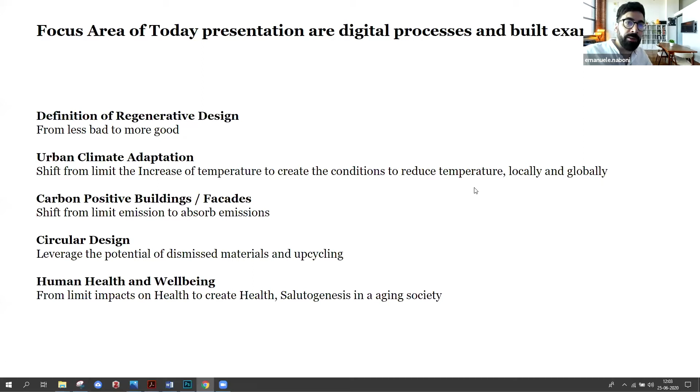So the content of this lecture is related to the definition of regenerative design. You may have heard of it—it's a radical sustainability, or a concept more aligned with Paris Climate and UN Sustainable Goals. Then we will discuss urban climate adaptation, certain strategies beyond conventional ones, and then a debate on carbon positive cities and buildings through the design of facades especially, with some mention of circular design and how the built environment can contribute to human health, and not least to well-being, if we consider that as an extended definition of human health.

If we look at the definition of sustainability, we can see that today it's defined as something that limits the impact of the built environment on the ecosystem. But if we look at a larger picture through this diagram, we can see that sustainable design basically looks to a set of solutions that do not touch the ecology, but preserve the system as it is.

A question can be: but the environment is already being damaged—don't we need to reverse damaging processes? That is what is called restorative design. But if we want to give a higher amplitude to this definition, what if we consider design as something that can enhance and co-evolve human and natural system quality together? So the lecture is around the concept of regenerative design, which, to say in a more general way, is a shift from doing less harm to the environment to doing something for the environment—doing more for the environment.

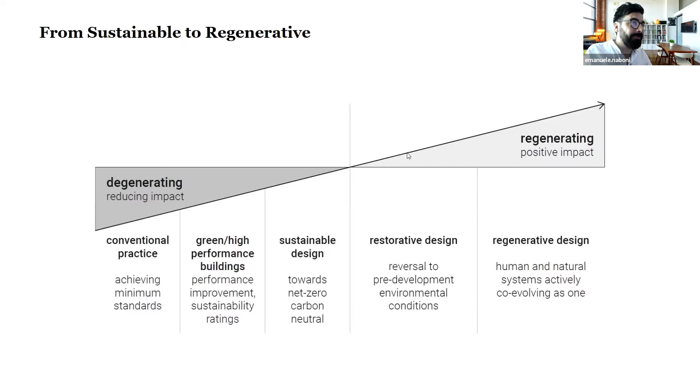And also, if we think about the triple bottom line definition by Mr. Elkington, it basically assumes that economical systems are of the same importance as ecological systems. So he is talking, and that was assumed and adopted by basically everyone, that economical systems and the ecosystem have to co-evolve. This is perhaps today debatable, and a new stance, proposed by the Stockholm Resilience Center, is that we have to put things in hierarchy—biosphere, for instance, is a layer of major importance.

There is someone speaking in the background. If you can please mute your microphone. Thank you.

So this is a key aspect, to put a hierarchy of value at the beginning of each of our projects. Also, if we look at our languages, if we look at sustainable definition, it's all about reducing damages: reduce the need for new ecological infrastructure, reduce the impacts, reduce the contribution to environmental damages.

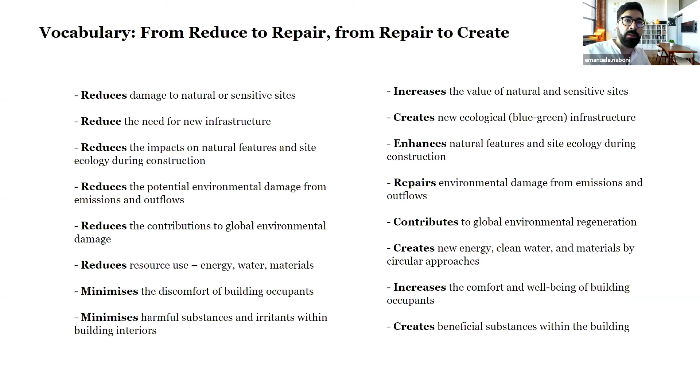Having established the pillars of this contribution, we begin with talking about city - how city can be enhanced in relation to nature, and not apart from nature. Here is some recommendation that will pop up in the contribution. The first is to consider multiple factors, ranging not only from performance-based approaches, but also qualitative factors. The second recommendation, which I'll explain later, is to use future climatic scenarios to design.

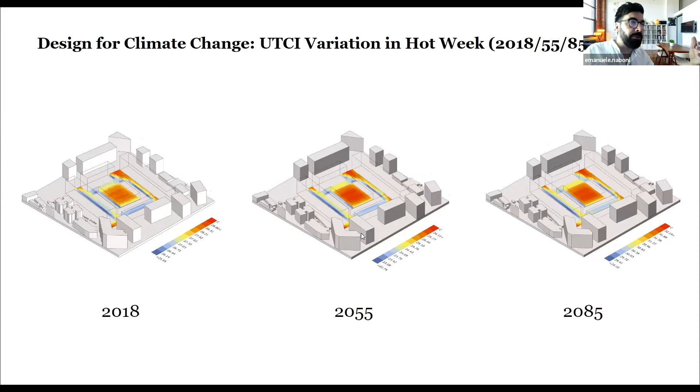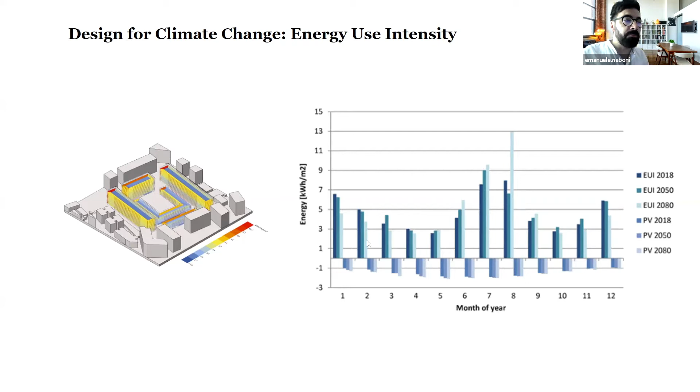And this has a series of circular changes that impact other factors. In particular, we can see that the change in the global and local microclimate is impacting energy consumption. We know, for instance, that buildings will be much more cooling-load dominated versus heating-load dominated. So winters are forecast, according to the majority of scenarios, to be milder, whereas summers are going to be hotter.

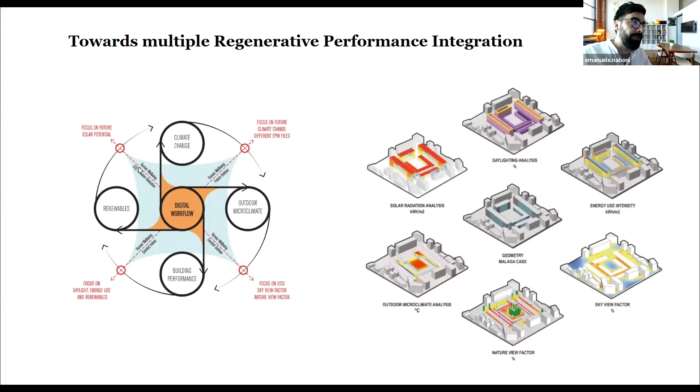The second set of recommendations is about trying to quantify also qualitative factors. For instance, here we have a chart with multiple factors that can be considered when we talk about climate adaptation of the city. Together with more standard building performance simulation related to performance of buildings and outer space, it's interesting to introduce other ways to account for, for instance, biophilia. This can be a nature view factor calculated from different points in space, as well as a sky view factor accounted as a purely qualitative metric, as studies support the idea that a vision of the sky brings value to the experience and to well-being.

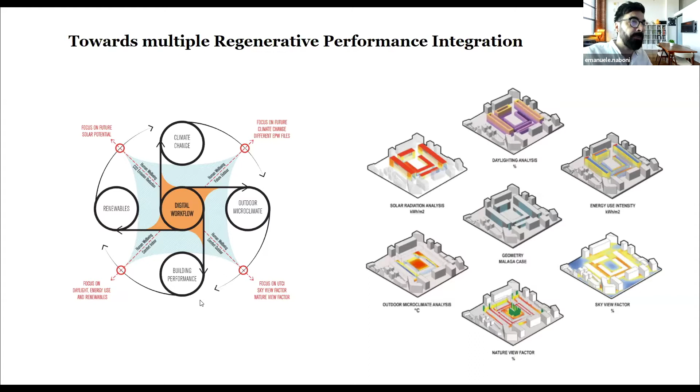Second recommendation is to choose the right type of simulation in your work. I'm actually polarizing a bit the presentation on this, as I know that at the SOS program there is a major interest in simulation, so I'll try to show some pieces of advice.

This is the EPFL campus in Lausanne, where I could stay for a couple of years. The work we undertook was to simulate the climate adaptation of the campus to future conditions, and also how the campus evolves within new climatic scenarios, and how carbon neutrality could be achieved. To engage with such a large campus, with buildings of different epochs and different types of materials within this fabric, and also with major impacting factors such as a big microclimatic feature given by Lake Geneva, we looked thoroughly into existing sets of simulation tools, but none of those was actually able to simulate the multiple factors, including all the energy exchanges as well as the microclimatic features of the site.

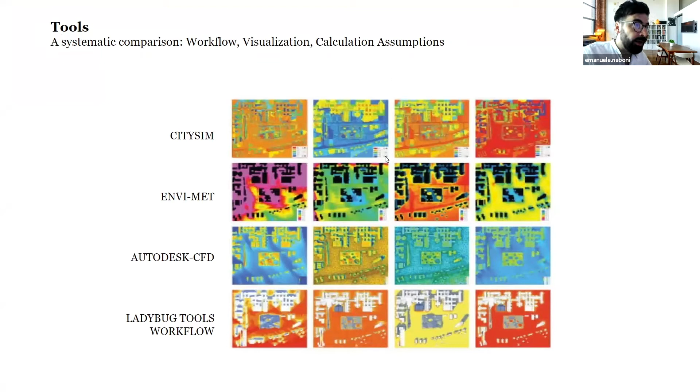So we further developed a software called CitySim. CitySim is a fast simulator, open source actually, that allows us to predict within a very reasonable time all the thermal and energy exchanges that happen in a site. We can call it a very simplified EnergyPlus, whereas all the sets of equations are interrelated to local exchanges, whereas EnergyPlus concentrates more on the inside-building exchanges.

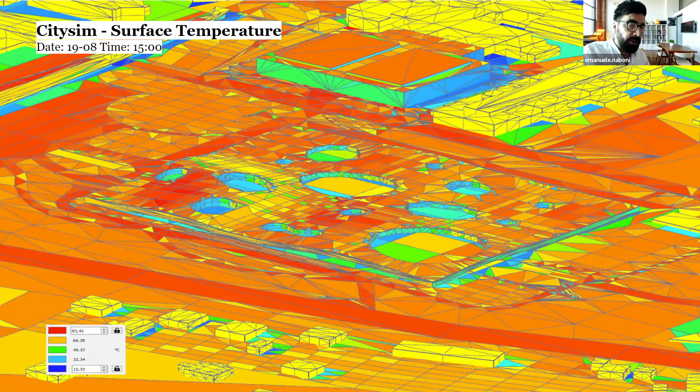So here, for example, is information about the temperature recorded for a given certain time in the year. This is a quite powerful tool because it allows, for instance, establishing a relation between building forms and the type of carbon performance of each. Then it's possible to associate a color code that establishes what type of building should be retrofitted. Furthermore, it's possible to include different retrofit strategies and balance and see what is the carbon impact of each building and of the campus as a whole.

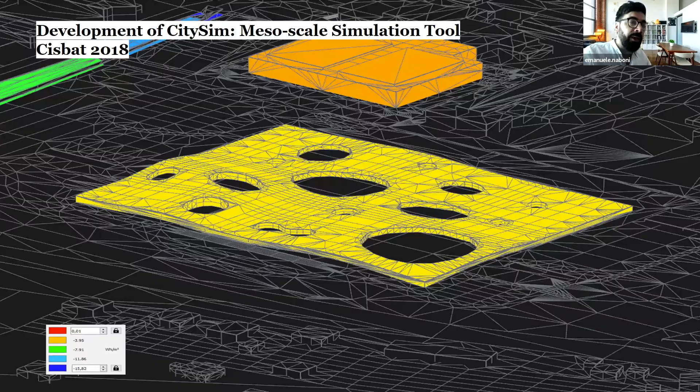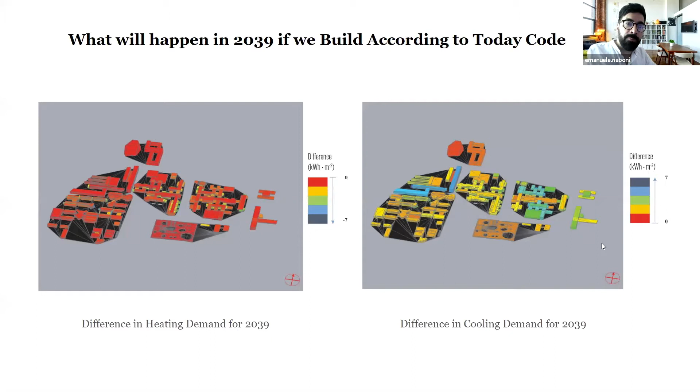This is, for instance, a calculation as a whole. What is interesting in this chart is that we are trying a scenario of adding insulation, which is what, for instance, the Swiss Minergie system would suggest. It's interesting how all the addition of insulation, which is today recommended by European norms, is going to fail in future summers, leading to a difference of 7 kilowatt-hours more in consumption. This is quite an interesting topic, which I will touch on later when we discuss the carbon neutrality of buildings. For now, just keep in mind that most of the legislation pushing for added insulation is probably misleading.

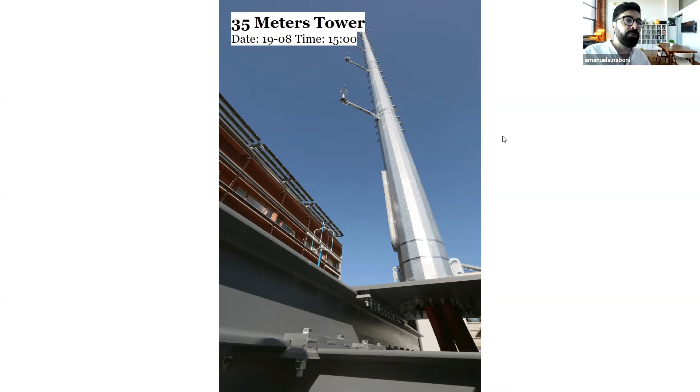Also, it's very important, when you achieve this work and when it's possible, to include a set of local measurements to calibrate the model. For this campus, for instance, we used 35-meter towers to get wind profiles and temperature profiles at different heights, as well as a small black globe thermometer to measure mean radiant temperature. Different points on campus were measured, as well as surface temperature, which is one of the outputs of the simulation, sampled and measured for different parts of the campus.

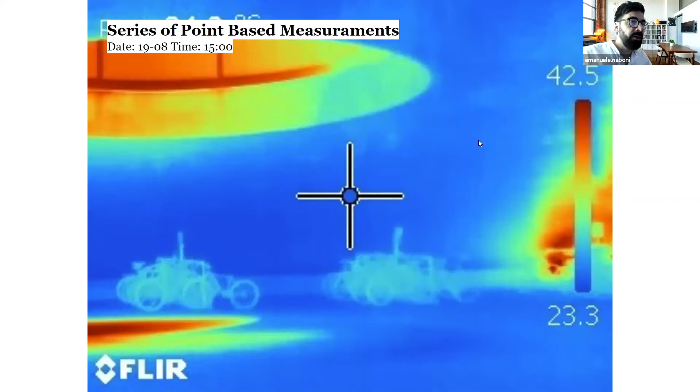This, for instance, is a study under the Rolex building of different key points.

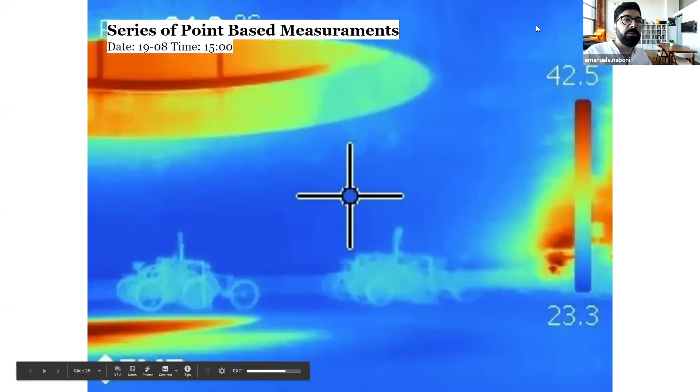Some information on which tool to use: when you can use ENVI-MET, when you can use Ladybug tools, when you can use CitySim, or other software such as Rayman. So it's a paradox, but basically not every tool fits every type of context, and depending on the type of exercise or work you are undertaking, it's important to choose the right tools. There is quite an accurate analysis looking at all the equations, publicly available on my ResearchGate.

Okay, second topic: carbon positive buildings. The first type of recommendation is to look at local climate and do some work assessing it.

To do so, especially in Copenhagen, we set up, in collaboration with the Technical University of Delft and Munich, a series of surveys of a certain area in Copenhagen, with real detecting of environmental factors. This is an evolution of climate work developed by TU Munich, which we transformed into a kind of climate cycling. The idea is to combine measurements together with simulation in order to understand the nature of a local microclimate.

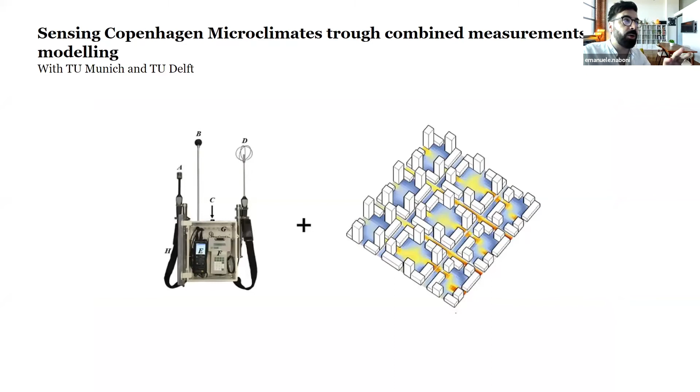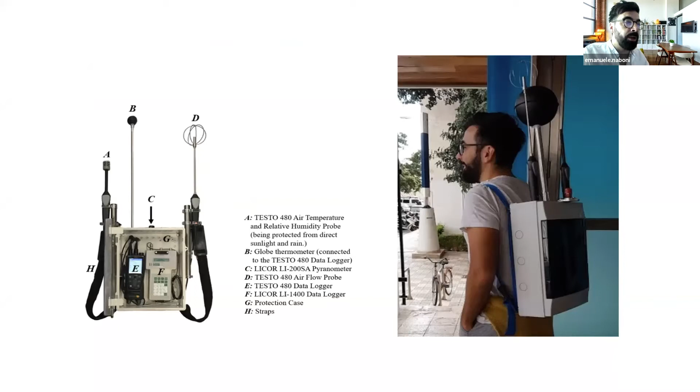Here is an open section of one of the devices that can be used to capture local information. These briefly range from wind speed to, in particular, the radiant environment and air temperature.

Also, it's quite important in this type of work to relate physiological values as additional information. So a set of measurements are taken on specific parts of the body that reveal adaptation.

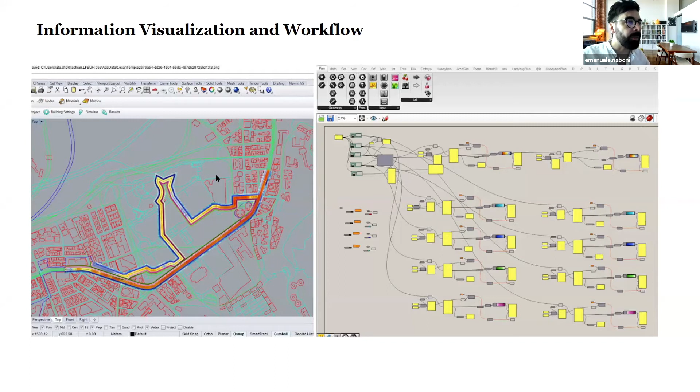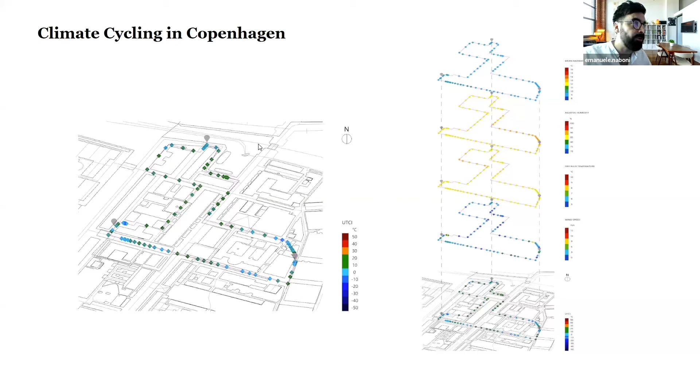As well, all these are mapped into points with different layers that can contribute to index definition. In this case, it's the universal thermal climate index that is reported, which is, as you may know, perhaps one of the most established ways to assess comfort outdoors.

Interestingly, it's then possible to calibrate simulation models in order to begin to establish a certain correlation between different urban forms and the type of experience that can be recorded.

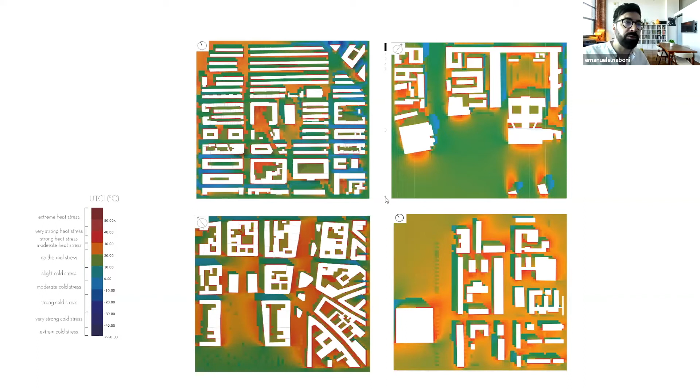This is key information not only for outdoor comfort, but also for the energy modeling of buildings, and localized weather files or specific point-based information are actually very much needed when you begin a design - much more than the simple weather file you get from a weather station. Most of the time, weather files from a weather station are misleading and will not lead to the best design for your climate.

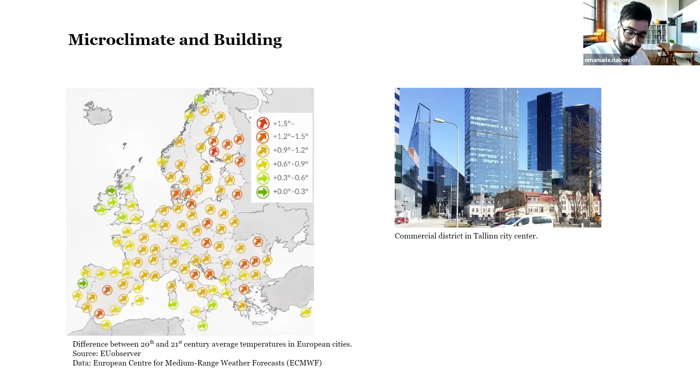Another interesting factor is about geometry—not of the building or urban morphology, but distance and positioning of buildings for new development. This is a hot topic, especially for cities like Tallinn or others in Northern Europe, where new sets of tall buildings are popping up. If we factor in the reflection and major modification that tall buildings imply for local climate, combined with climate change scenarios, it becomes quite relevant to understand how to distance or arrange arrays of buildings.

So just as you would do with 3 cards, in this exercise we've taken 3 tall buildings and begun to change their distance, even with very minimal fine-tuning modifications. For instance, distancing the buildings from 12 to 30 meters may not sound like much in terms of meters, but let's see the thermal implications.

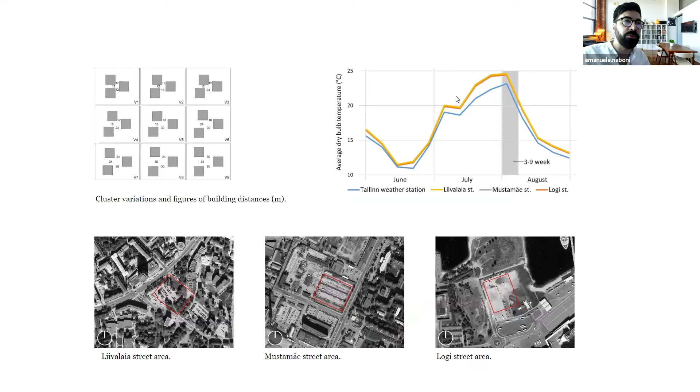We also try to understand how different layouts perform at different sites within the city of Tallinn. The first step is to use Dragonfly, or the urban weather generator, to create local microclimates. The second step is a workflow that allows you to understand all the temperatures and thermal exchanges—related to short wave, long wave, and convection—through computational fluid dynamic simulation.

What's interesting from this first analysis is that site percentage, or hours of comfort, can differ a lot from building array to building array. This is important information—we can see, for instance, that one configuration will perform well on one site but badly on another site in the city. Comfort can range from 30 to 50 hours depending on the type of design and the type of location. So this is quite relevant: small modifications can have a big impact.

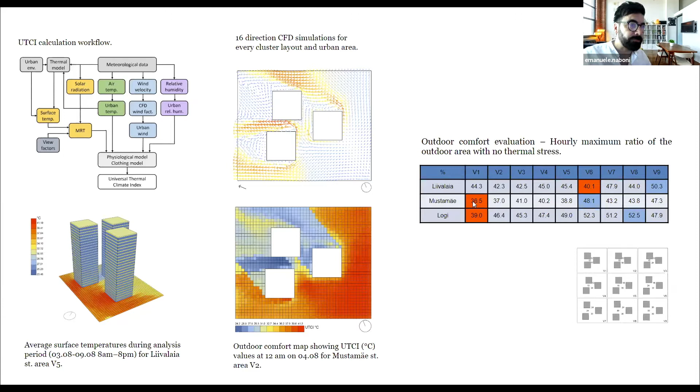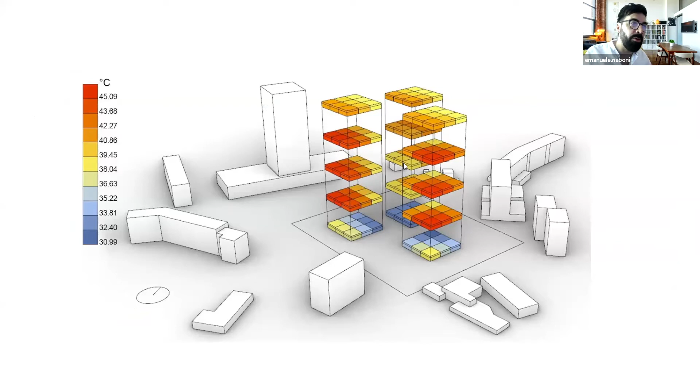The second point is about how the distance between buildings and the microclimate impacts what's happening in terms of comfort within the buildings. Due particularly to the co-reflection that happens between buildings, and due also to shading among buildings, it's interesting to see that depending on the type of site, a different layout may be more performative. These are the 3 sites.

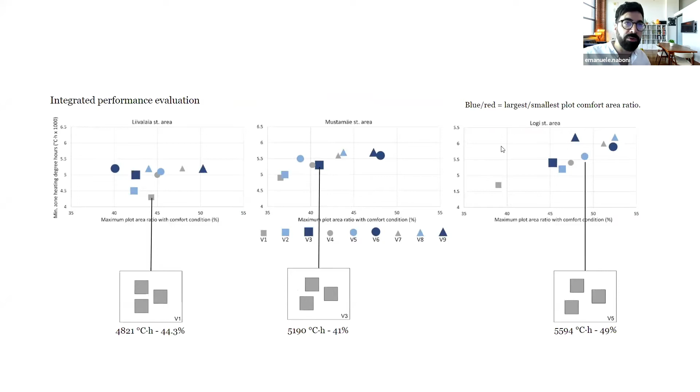We can see that a small modification of the layout can lead to major modification in terms of energy consumption and comfort.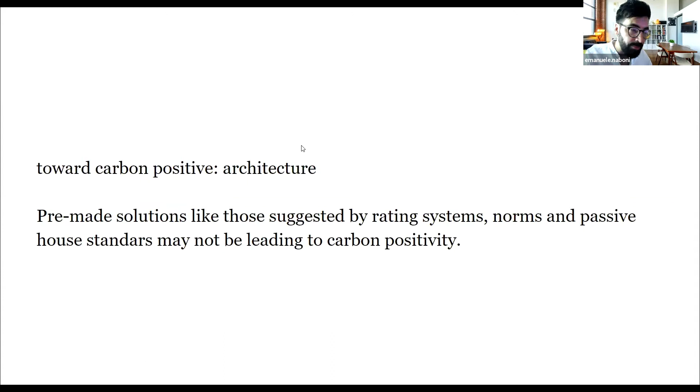Another aspect is about predefined solutions, as those suggested by rating systems such as the passive house standards, or European regulations concerning the thickness and type of insulation and the transmission values. It's mandatory according to the European Union. Let's have a critical look at this type of topic.

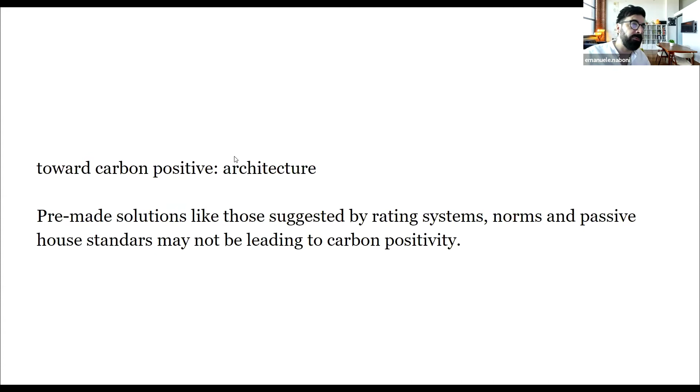You may have gone through the book Heating, Cooling and Lighting by Norbert Lechner. He sustained that just by building design, it's possible to achieve savings of up to 70%. This was elaborated in the 70s and was not sustained by simulation, and it makes mechanical engineers quite skeptical, because they believe mechanical plants have the major power. So, of course, this is a big debate, and we can take it to the next step in other circumstances.

Throughout this experiment—basically 25 million combinations of simple building types, from square to rectangular to more elongated, and modifications of building envelopes from more massive to more insulated—we can see that just by architectural manipulation, without any mechanical plants, it's possible to reach energy savings of up to 80%. This means plants are not needed, or only minimally needed. This applies both to commercial and residential buildings. Mechanical plants are an addition, but in most cases, I would sustain they are not needed.

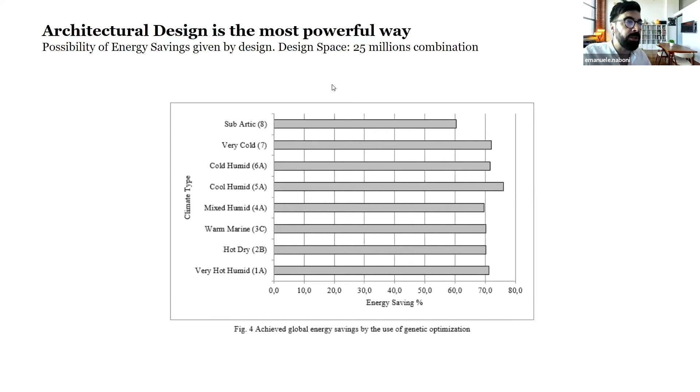This includes, of course, natural ventilation among the set of strategies.

Going more into numbers, one important thing is U-value and thickness of insulation. It's interesting—there's a very optimal thickness of insulation according to the distribution of values on a Pareto front. The prescribed insulation thicknesses are much lower than those prescribed by regulation, and prescribe much more use of thermal mass. In certain cases, especially in the South, light and poorly insulated buildings will perform much better than heavily insulated buildings. This makes logical sense if you think about it.

Insulation is nothing else than, let's say, a wool sweater that you put on and cannot take off. In summer, this sweater cannot be taken out. So insulation only performs when you have a mechanically ventilated building with cooling, which honestly we should not aim for. Our building should not rely on a mechanical system, as it's completely possible to avoid them. So this is quite misleading, and that's why most recently designed buildings are overheated in summer.

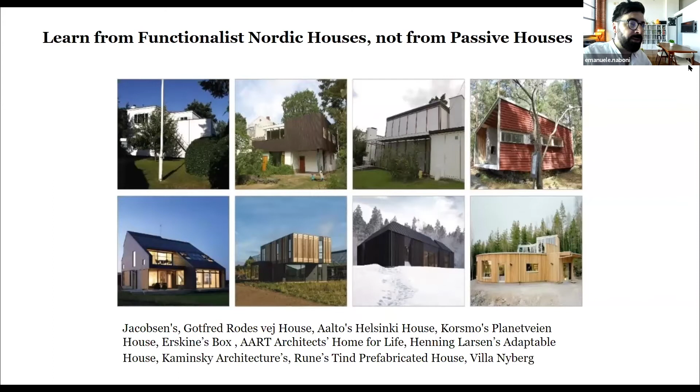I will demonstrate this through a series of buildings that I personally studied in a Northern climate, designed by architects for themselves. We have the house of Alvar Aalto, the Korsmo, Ralph Erskine, as well as Jacobsen house, each in a different Scandinavian country. And in the second row, we have buildings designed according to the recent paradigm of passive house, adaptable house, prefabricated house, and so on.

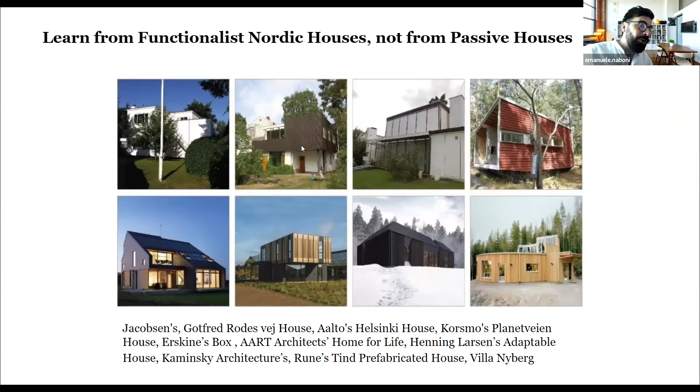So we have developed models of this and created every type of simulation. The idea is to compare environments such as those of passive house, where you want a uniform luminosity, a uniform thermal environment with equal distribution of heat within the site, and where the building is conceived as an envelope acting like the walls of a fridge or an oven. Therefore you're able to keep the temperature stable and control any type of factor.

What if we compare one of these examples to the Erskine house built in a forest in Sweden? This was built with no access to any type of industry, because it was built during the Second World War, when Erskine came from England to Sweden to practice as an architect. Because of this big conflict, he had to build something relying only on local sources of energy, reclaimed local material, material found within a range of 3-4 kilometers.

So some aspects of bioclimatic design are interesting. On the northern side, there are no windows, and wood is stacked, especially in winter, to break thermal exchanges, the radiant thermal exchanges with the outside. You can see there is a double door closing off a space - two doors, as in most houses of this modernist period. We can also see thermal mass located in a certain way, connected to the outside to maintain a certain gradient of heat.

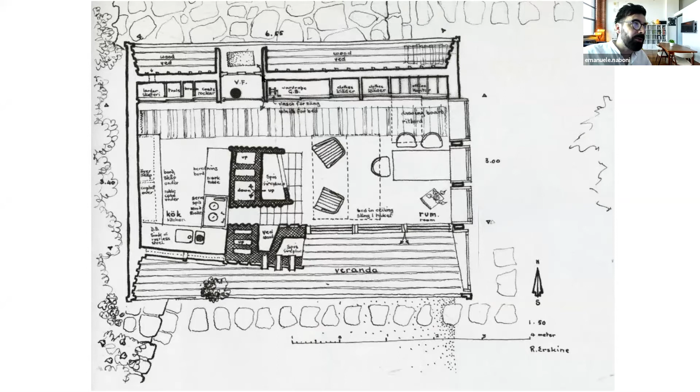Here you can see the double door, the vestibule, if you want to use a Latin term. This could be a two-hour lecture, but I'll move on to share another situation.

But if you look at other types of impact, without going into biophysics factors or light quality, it's something that really needs more time to debate.

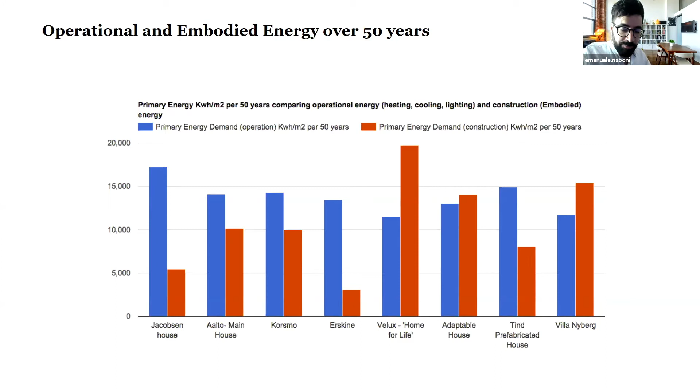This is something to think about. I believe pre-Carrier, pre-mechanical system, pre-industrialized architecture has certain values that can be rediscovered in modern construction.

My idea is that perhaps we can rediscover this older way of relating to the site versus the newer way. I'll move on to stay on time, but I'm happy to come back to that. It's also interesting to think of buildings not only in an introvert way, but also in an extrovert way—buildings that provide something for the outdoor.

In Copenhagen, I've established a series of facilities where we've begun tracking the impact using a very simple paper-made facade—what's the impact on the indoor, but also a similar measurement tool located outdoors.

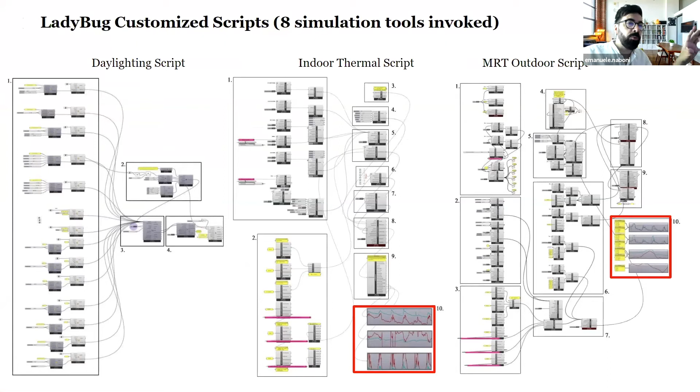So the question is, how can we make a facade that gives a positive thermal contribution both to the indoor and the outdoor? With warming cities, it's important to have cooler streets, and in northern winter climates, it's important to have warmer streets. So let's think of the envelope as a climate giver, not only for the indoor, but also for the outdoor.

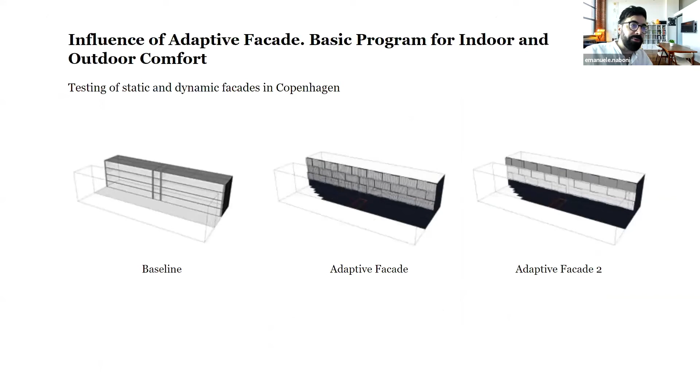Through a set of calibrations at different scales, we see that depending on the type of facade—for instance, here we've taken four types for a building retrofit, from no shading to steady-state shading to dynamic Venetian blinds to adaptive facades of different kinds—the results are quite interesting. We see different temperatures achieved indoors. Okay, nothing new, we knew that.

But what's interesting is that we can significantly change the climate on the street, especially in small canyons, and also for large spaces—all the areas near the facade can be controlled by changing the facade type.

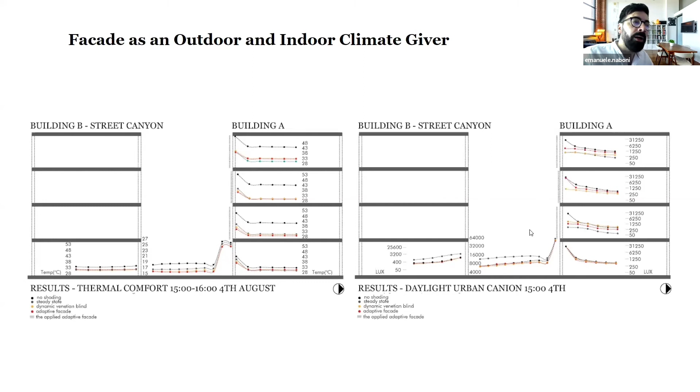So you understand that with very little cosmetic intervention, it's possible to have a big impact on the microclimate experienced outdoors.

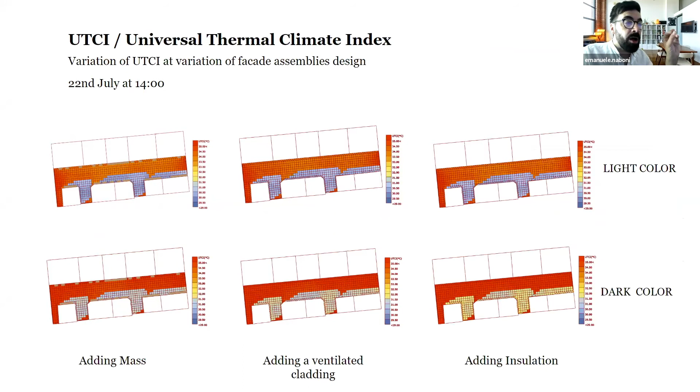Just to provide an example—changing the color of the facade to simplify and target this small variable will have an impact. This is a study in Catania. On the outside, we see different colors of UTCI outdoors, and as we know, this will also impact the indoor.

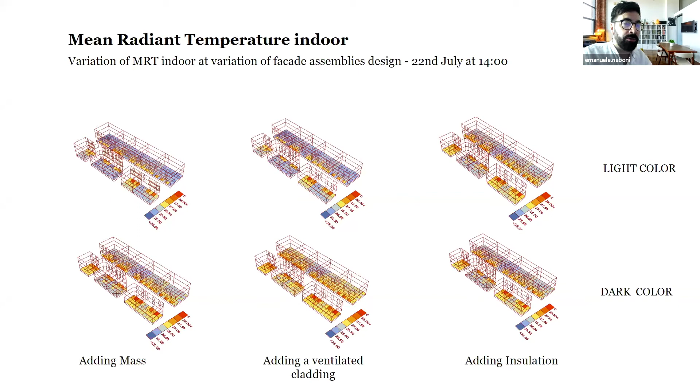So what I'm advocating is that whenever you design your envelope from now on, always model the outdoor and the indoor at the same time.

Another recommendation is about using prototypes, because they offer much more insight than simulation. When you design your strategy, I suggest leaving your desk and computer—which also isn't great for your eyes—and engaging with physical models.

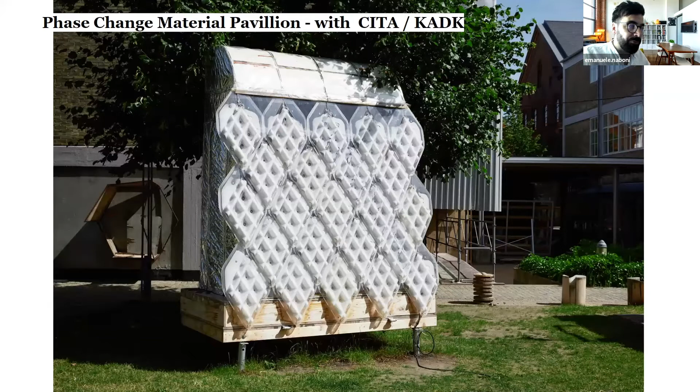These are some studies I've worked on. This one is about phase change material—with digital printing, we've formed different layouts and tried different mixes of phase change material. This is a very interesting study, conducted with CITA and KADK.

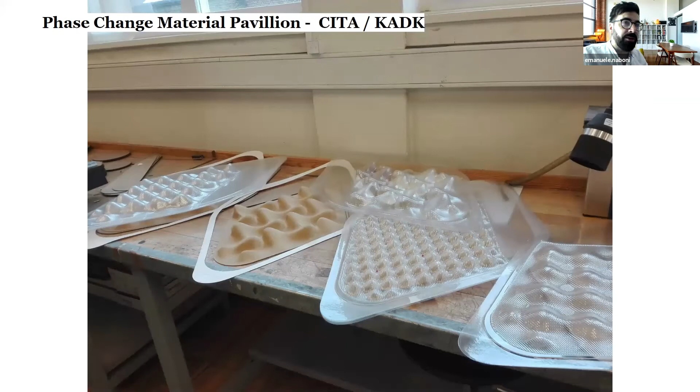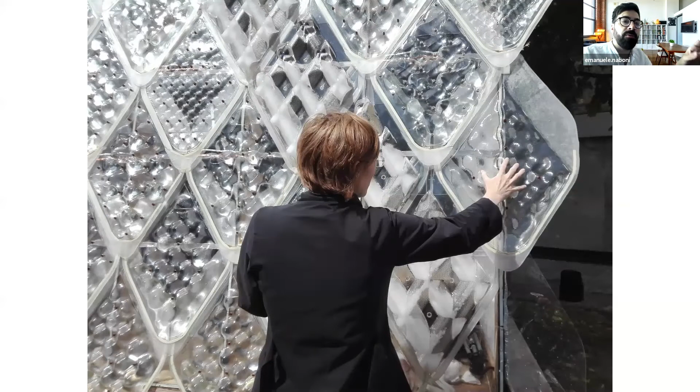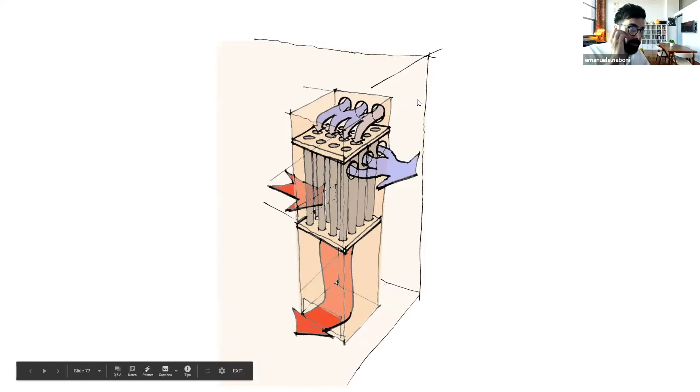Also, thinking about air exchanges, I found very old notes from a professor at the Danish Technical University from 1952. Using these old sketches, I tried to develop, calibrate, and perfect a system of air exchange for a small prototype I could create in Copenhagen, where there's a natural exchange of air between indoor and outdoor. Here is the sketch, where basically we use this metal tube to exchange heat. What's interesting is that through measurement, you can extend the time of passive ventilation and climate control for the building for most of the year. It's a small prototype, but it shows how by exchanging heat between inside and outside, you can create a passive building at basically no cost.

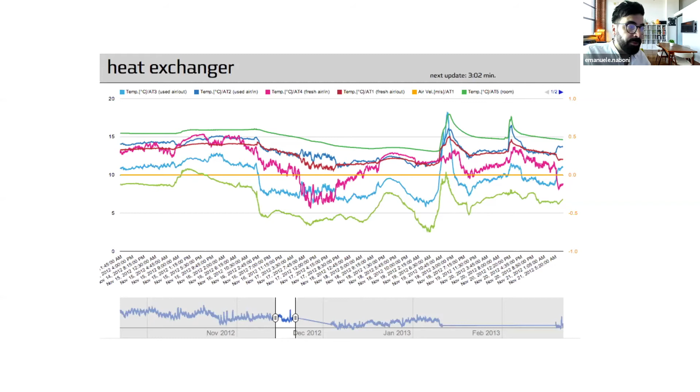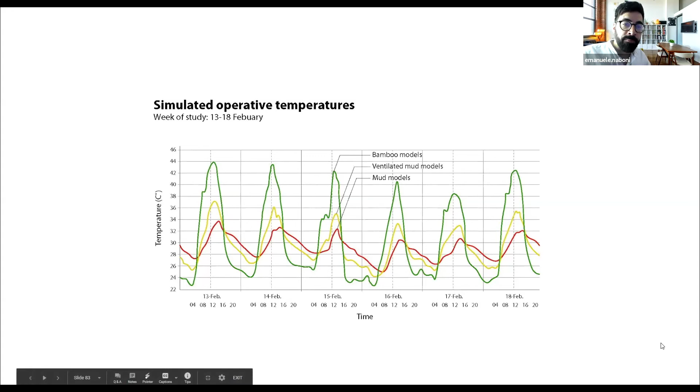What we can see, for instance, is that at night, when these buildings are occupied, the temperatures are much lower when roofs are thatched or made of bamboo, rather than corrugated, which is what's actually being proposed today. On the other hand, if the building is occupied during the day, it becomes much more interesting to use a corrugated roof. So depending on the type of building, you can choose the type of roof, and even in houses with both day and night use, you can differentiate the roof accordingly. This has now been used as a recommendation for new villages in Tanzania.

When it comes to another pillar of this presentation, the topic of circular design and generation of health, I'll present some of the work we've established along with the Master of Architecture in Extreme Environments. This is a two-year master's, perhaps similar to yours, that operates in extreme conditions where there's a decrease in quality, whether in climate, access to the area, pollution from a cycle that has heavily polluted the environment, or because human conditions are quite deteriorated. This master goes to a different location every year. I will keep this collaboration—I moved to Parma University but remain a part-time professor in Denmark too. The idea is to use small hacks or prototypes to solve some of these situations, and also collect information for future design. As shown before with the house example, it's possible to generate direction from a small example for the second semester, where students can create their own project development.

I'll show a video that introduces the work we did this winter, where we went to the Atacama Desert in Chile. I hope you can hear the sound.

So one of the important aspects to remember is that we don't want the students to be engineers or scientists, but to recognize the importance of the scientific method in collaborating with different technical competences. Hence the balance between having one foot within the very performance and scientifically orientated aspects of architecture, and on the other hand...

A very artistic consideration of what is it that I want to say in the world, where am I talking from, and why. That is reflected in the course, both in the prototypes that they do, and through that exercise, finding a program and a building.

Okay, so the idea is to create prototypes that collect information of different kinds. You can also access this on YouTube under architecture and extreme environments, where you have a gallery with many of them related to different environmental topics.

Coming back to some of the directions that may be usable for you, one idea is that we can look into, for instance, circularity, which is external to the cycle of buildings. Here I show perhaps another video of a specific prototype developed by this student.

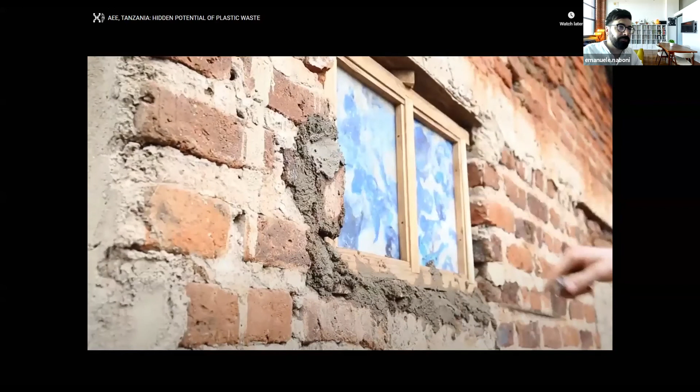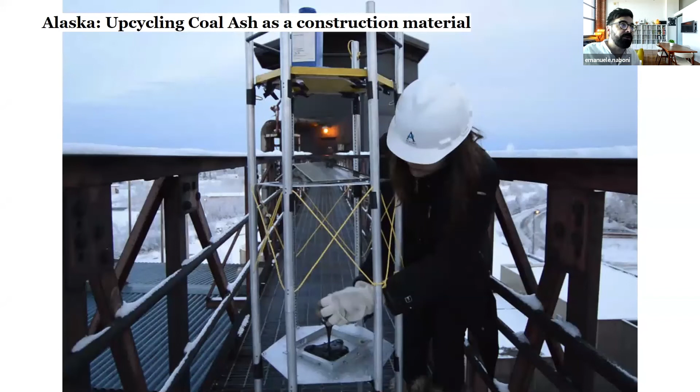Okay, so I guess you have gotten the idea of these prototypes, but some of these have even scaled up to some patents. For instance, this one, which is about upcycling coal ash as a construction material.

We also patented a way to convert sand from the Gobi Desert into a construction material, as well as to use waste wool or textiles and crystal salt available in the Gobi Desert as an air purifier. So you can see that a whole set of material from other industries can be brought into the industry.

Another aspect explored throughout these devices is well-being, health, thermal comfort, and establishing this not only as a pure performance, as a pure numerical factor.

Here is an example that we just published in Energy and Buildings, which is about designing spaces and outdoor spaces that relate much more to the displacement of heat and cold sensors within the body. Heat and cold sensors are located in different areas, and each of which is activated at different temperatures.

So the idea is, what if we begin to look at climate not according to standard measurements, but according to the position of thermal receptors in the body? And this can be information that we can use to design spaces.

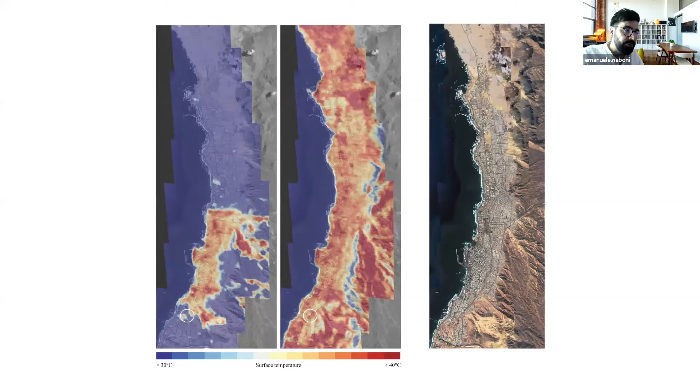This has been further developed in the city of Antofagasta in Chile during the extreme environment mission of this year with Amy, an English student I work with. We began to study through satellite images how different urban patterns determine different microclimates.

And then we came up with the idea that although it's a very hot, dry area, adding mist could create major comfort. And this is not supported, for instance, by psychrometric charts, where the more you increase humidity ratio, the more you will experience discomfort.

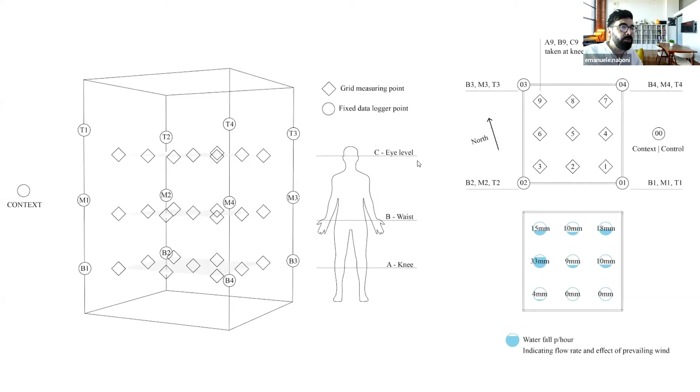The idea here is that we can play with the perception of the human and with the location of the body's sensors and stimulate just some of them. So we created a system such as this, which basically creates mist at different heights.

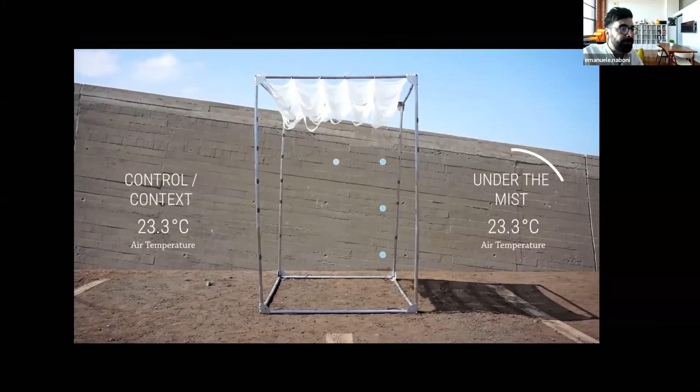Throughout a set of sensors, we begin to measure for each of the points within the space how temperature is distributed in the surrounding. The system sprays water, but mainly retains water throughout this very small system.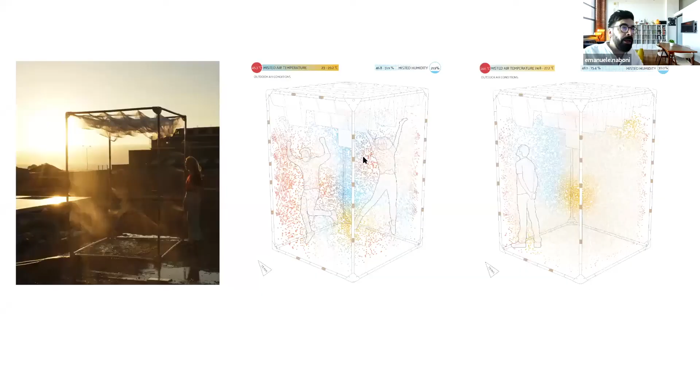What is quite interesting is that from one side, they're recording on site a different point of, for instance, the UTCI, and from the other side, the information that comes from surveys. It's very remarkable that the system can obviously reduce the local temperature, but the perception of reduction of temperature, which is much needed in that area, is much higher, because other factors such as thermal perception, alliesthesia, or thermal delight have to be taken into account when we talk about comfort.

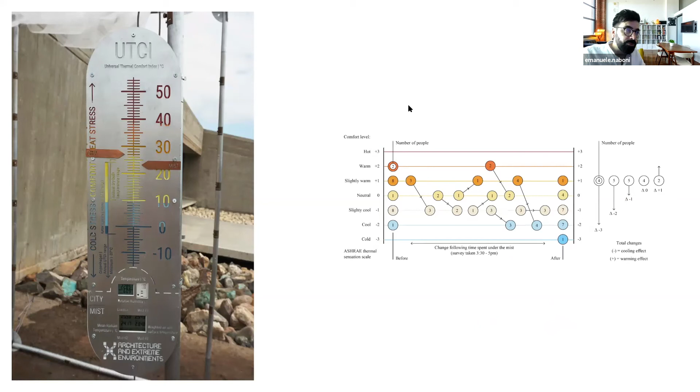This is a branch of studies that I will also show later in a later example. We have perhaps 5 more minutes, so I'll try to go through a bit faster.

I want to show a further example of how with a small architecture it's possible to create a microclimate. We've seen that before, but I also want to share how it's possible to use a completely local-based cycle in order to create a microclimate. This is the Amazon forest, where every day you have 1 hour of rain at a given time, and it's also a site with major availability of bamboo and where there is glue, actually rubber, that can be locally made and developed into surfaces. So this is a completely local-based prototype where only the metal rings come from Copenhagen.

This is a system meant to use local water in order to create a microclimate for the 24-hour cycle. Now you can see how it works.

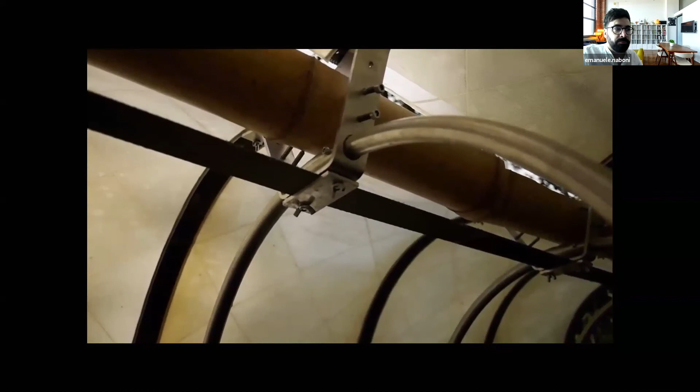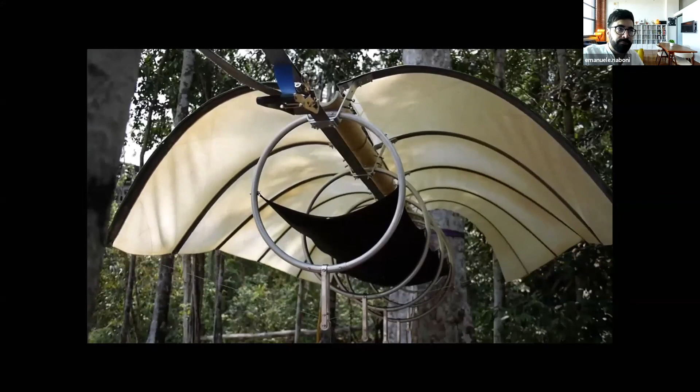So water is collected into plastic bags - these are hospital bags. When water finishes, the hospital bag begins to drop water, and this begins to happen. But what we have achieved is this ring where the water still collected is at a much lower temperature. So they create a mean radiant temperature, the local mean radiant temperature, which is ensured for a few hours after the water event.

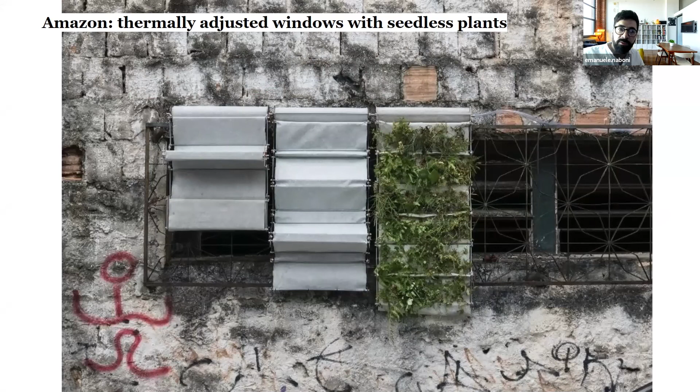We developed many of these technologies that are very intuitive to use and that add a design component. For instance, this is a small and cheap unit to purify air for one house in China, which is completely passive. Or this is a curtain system which employs seedless plants from the forest in order to create outdoor and indoor microclimate of a certain type.

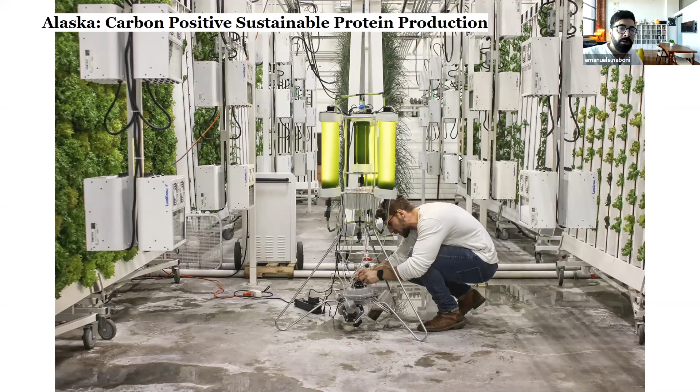We also touched several other topics. For instance, how to create protein within the Nordic pole by developing certain algae which are actually conserved into the ices. Or this prototype of a lamp is basically completely passive, and it also purifies water, but it also stores energy that is then used during night to achieve light.

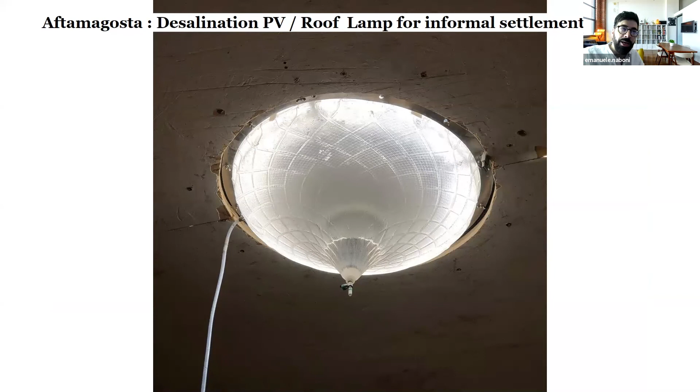So you can then browse more of these prototypes on YouTube. Now, to conclude, I would like to show some building examples. These come from my practice.

The first is the Oakland Cathedral of Christ, close to San Francisco. These are only examples that incorporate the values you have seen before, particularly examples incorporating biomimicry - the mimicking of phenomena in nature - and biophilia. These are examples that nourish this non-saturated thermal aspect, and by playing with the luminous environment, the color of material, and the height of space, it's possible to create thermal conditions that make people who come to this church comfortable, whereas there is no mechanical system.

What is very important, I think, in thermal, lighting, and comfort is not to use static metrics, but to create an ever-changing environment. This is activated here by triangular panels that regulate light, ventilation, and intake of heat. This is also sustained by thermal models, where it's possible to see through finite element methods that certain areas, such as the basement, are kept in full comfort throughout the year by means of thermal mass, but also by means of this very high space.

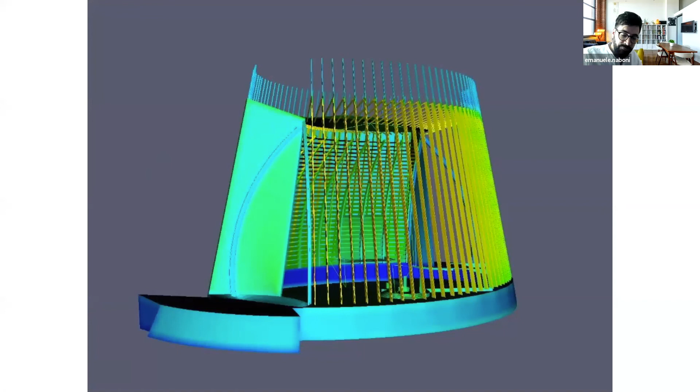Here is another example, in Italy. I developed the sustainability concept for the Lavazza headquarters in Torino during the competition phase, when the project was awarded. The idea is that the building is a regenerative building which adds value to the site. The building follows the solar envelope principle, so it doesn't create shade and doesn't compromise the ability of the surrounding buildings to receive heat.

So it's very important, for instance, if you are modeling the efficiency of the building, that you do two models - one model for the building and one model for the surrounding. To me, architecture that is introvertly developed, just modeling the performance of the architecture itself, doesn't make sense. It's important to model the energy performance of the whole surrounding. Each of these buildings has to be enhanced, if not, at least not harmed by the new development.

So this is another recommendation I would give you: if whatever you are designing, model also the context, and try to understand the consequences for the context. I will not spend much more words on the regenerative agenda and how this is a landing surface for bird migration.

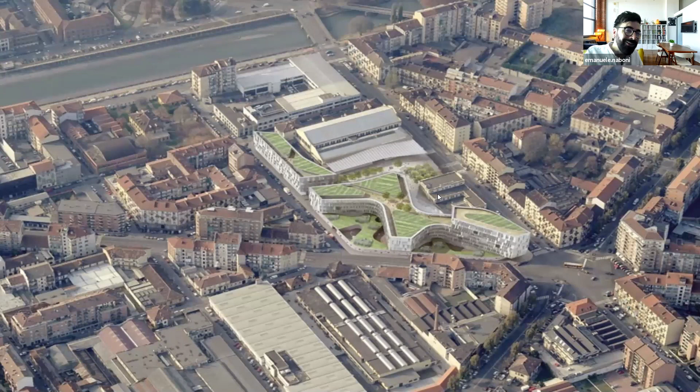This requires much more time, but perhaps it's interesting that the envelope where each facade creates thermal asymmetry. Each change, from double facade to trombe wall to different colors, creates different luminosity and different thermal conditions, different surface temperature on the indoor. This means our body has different thermal stimuli, and all research today supports, especially for diabetics but also general health, that the envelope has to create differential surface temperature.

The death of the human is when you want a space which has the same temperature everywhere, which is actually what you do with radiant systems and what you want to achieve in any passive house or commercial development with this type of agenda. This is actually the fastest track to generate some of the diseases of those working in offices, especially.

So we have to incorporate always the latest findings of science. Never believe what circulates as information in the building field. Skip completely all the information that comes from the building field. Go directly to science, look at thermal comfort literature from medicine, and then try to implement that.

This is the latest project I showed, with Bjarke Ingels, where I could curate part of the sustainable strategy. In this case, it's in the Faroe Islands, an educational center.

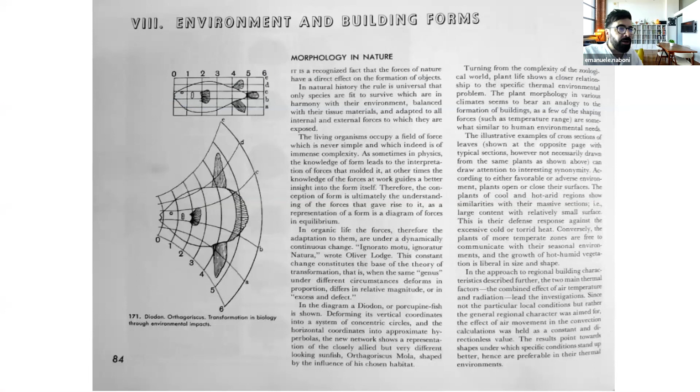Another concept was related to daylighting, one aspect we could simulate in this Mirror Sky lab that we run in Copenhagen. This has led, for instance, to a design where only the structure is an opaque surface, but each of the other surfaces is actually in glass, so that light can penetrate even into the basement of the building, providing enough lux to conduct activity, and also establish a visual connection between indoor and outdoor.

Okay, in summary, not to take more of your time: the key messages I wanted to convey are that architecture should connect as much as possible to the ecosystem. Perhaps I haven't shown much of nature-based solutions - I can do this another time - but I think each object that we build should try to pose the question: what are we giving to the environment with this project?

The second is, what are we giving to people with this project? And not only the people that live in the building, but what are we giving to the surrounding, in order to create this relation between human and nature? And also, how can we design buildings that give more, in terms of, for instance, absorbing pollution or creating energy for the context? And how can the facade provide a climate for the outdoor?